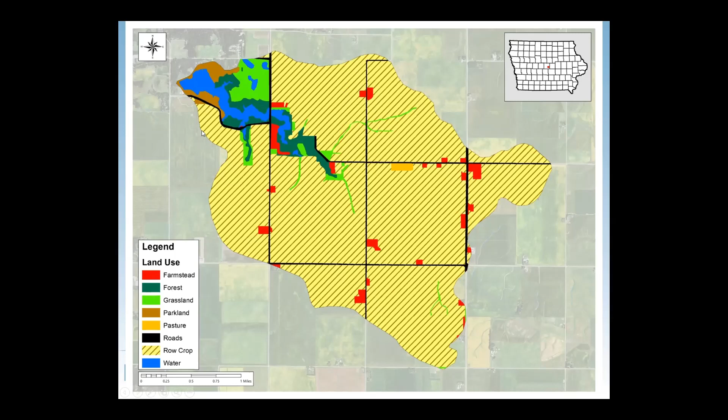We'll sometimes zoom in a little bit on the lake if we want to show features that are happening inside of that park area and inside of the lake. On this one, Jim's going to talk about where we have information, which is indicated here with this little red disc. And so sometimes you'll see us zoom in a little bit on the map, but you'll still have that red outline of the watershed in all of our maps too, so that you get an idea of what we're concerned with. So that's watershed.

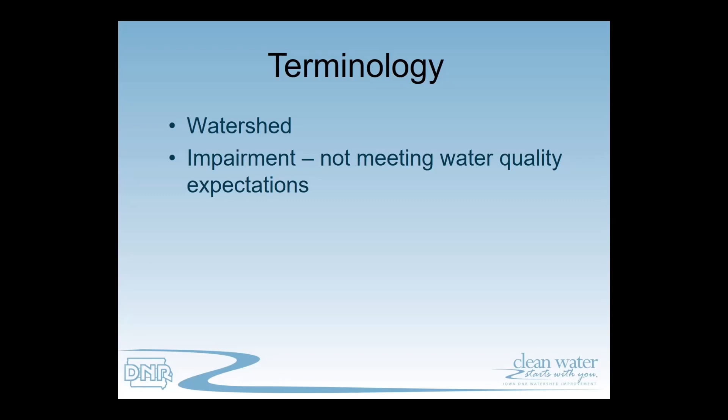And the next term that I want to cover is impairment, something that you'll hear a lot or see a lot. Basically, any time that we're talking about an impairment, what we're referring to is something that's not meeting our water quality expectations. So this can be a lot of things. Jim's going to talk about what specifically the impairment is for Hickory Grove Lake, but anytime we are working in any watershed across the state, that's why we're here. This program is designed to try to figure out what's going on in the water body where it's not meeting expectations. And so that's all that word stands for, is that there's something that's wrong with the lake based on what our expectations are for that lake or stream if we're working in streams.

The next terms, point and non-point source pollution. Basically, we don't have to worry about point source pollution in this particular project. Jim will talk about that a little bit more. The way that I like to think about point source pollution is that it's covered under a permit that the department would issue. We see that a lot with, say, wastewater treatment plants or industrial facilities that get issued a permit that allows them to put water into the waters of the state that may contain a pollutant of concern. We don't have any of that in this particular watershed, so we don't have to worry about it.

Non-point means everything that's not permitted that would contain that type of pollution. And that's what we're most concerned with in this lake, is that we're having too much of that non-point source pollution that's coming in. Jim's going to get into some specific ideas, but I think that the main thing to take away about non-point pollution is that it is not permitted discharges. It just happens through various sources to get itself into the lake.

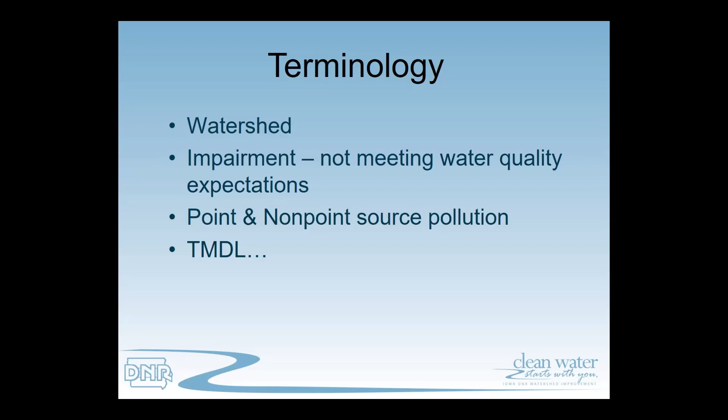And then finally, I wanted to cover the term TMDL. We already had it on the original slide, as my title is the TMDL program lead. Jim's the TMDL project lead. And so what does that stand for? The acronym stands for total maximum daily load. And those words are very important to our work. I found this picture a long time ago when I started working, and I thought it really helped me understand what it was that we were trying to do.

If you see this pack mule here and the cart that's humorously packed way too much and has him up in the air, imagine that there were no boxes on that cart, and that donkey could run around all day with that cart on his back without really any issue. Now, as we start to add boxes to the back of that cart, it gets harder and harder for that animal to pull that cart around, to the point where he's not going to be able to move it at all, and to this point where it's so much weight that it actually flips him up in the air.

And if we think about this with a water body like a lake, and the boxes being pollutant, we can put a box or two or three or maybe even four boxes of pollution onto that lake, and it's going to be fine. It's still going to meet our expectations. There's an amount of natural ability for a water body to assimilate, is what we call it, but basically handle a certain amount of pollution and not violate any of the expectations that we have for that particular water body. But if we put too many boxes of pollution into the lake, we're going to start seeing problems. And so our goal with the total maximum daily load document and the program is to figure out how many boxes we need to take off.

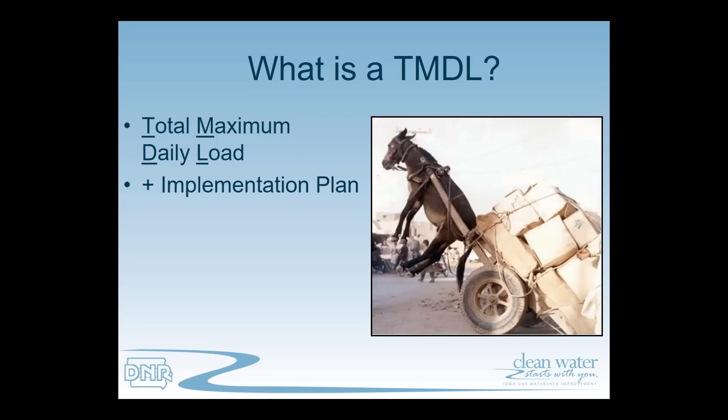Those two things together, Chapters 3 and 4, we consider those the major elements that create what we call a water quality improvement plan. So you may see that term on the front of the document and wonder what that means. What we feel that means is not only the TMDL numbers, but also the information to help start the planning process. So that's what the water quality improvement plan is. Sometimes I refer to the document as a TMDL. You may hear that sometimes as well. They're somewhat interchangeable, but those are what those terms mean.

And then I wanted to just show one of the charts that Jim is going to show. And I think this is an important point. Anytime that you're in a presentation or that you're reading a paper like this and you see charts, we're trying to convey a lot of different information with what we're doing. And the benefit of a recorded presentation like this is that if it doesn't make sense the first time, you can hit pause, you can continue to look at the graph or the map to make sure that you get it before you move on, or just hit back 30 seconds or 2 minutes and restart the presentation from the point that that slide starts.

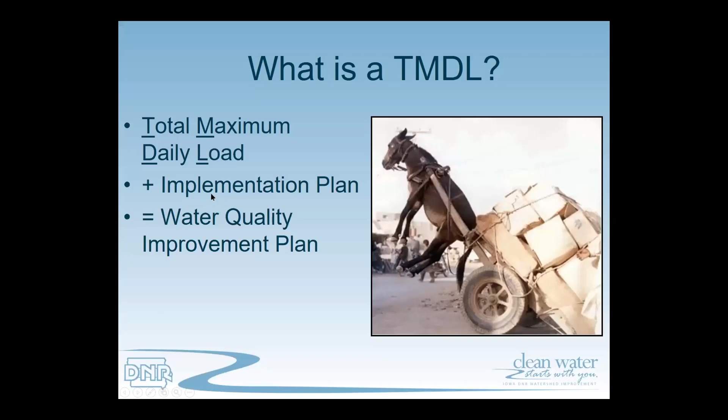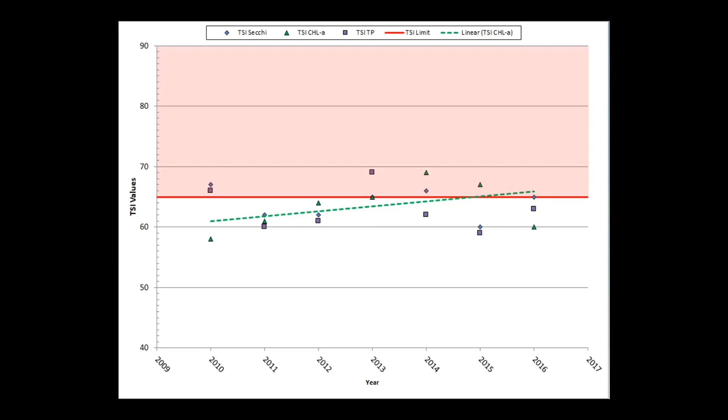So again, Jim's going to walk you through that and explain it, but anytime I see something like this, I'm going to make sure that I understand what the scales are telling me, what the axes are telling me, what the points are telling me. So that's just a little note before we go. And next up, we'll have Jim take us home.

We're going to talk a real brief description about Hickory Grove Lake and the watershed itself. We're going to talk about water quality assessment, how we determine a lake is impaired, how we go about doing that, and then we're going to talk about our TMDL development. As Jeff had mentioned, it's a mathematical equation, how we develop the math to come up with that maximum daily load. And then we're going to talk just real briefly again about implementation planning, some things that we can do moving forward.

Okay, so for a water quality improvement plan, the first step that we take is to monitor and assess a water body. That entails us collecting samples and doing some analysis on those samples that we've collected. Then we do a draft water quality improvement plan, and that's kind of where we are right now.

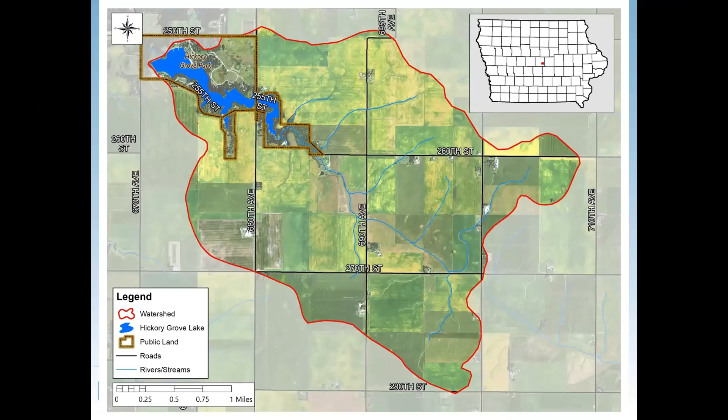Okay, so the watershed itself, Jeff talked about that a little bit. The watershed itself has a drainage area of approximately 4,037 acres. And the lake is located within the Hickory Grove Park, which has an area of about 445 acres. Hickory Grove Park is owned, maintained and operated by Story County.

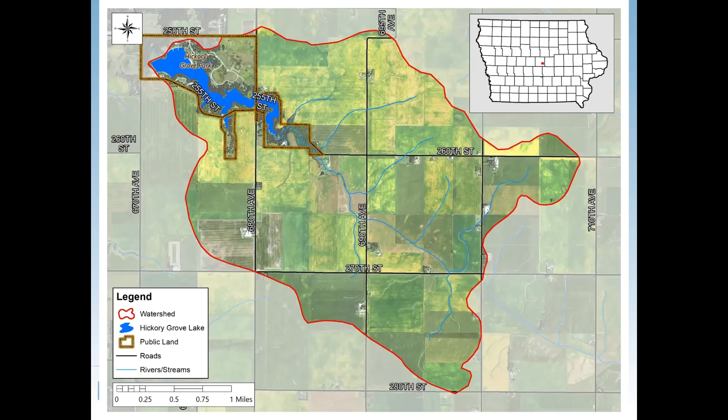We look at the land use within the watershed. It's pretty much strictly row crop, with 85% of the land as row crop. That would be either corn or soybeans, but a very large percentage of the land is row crop. And some of these other ones like grasslands and roads and water and forest, each of those make up 3% of the watershed. Again, row crop makes a very large percentage of the land use within the watershed.

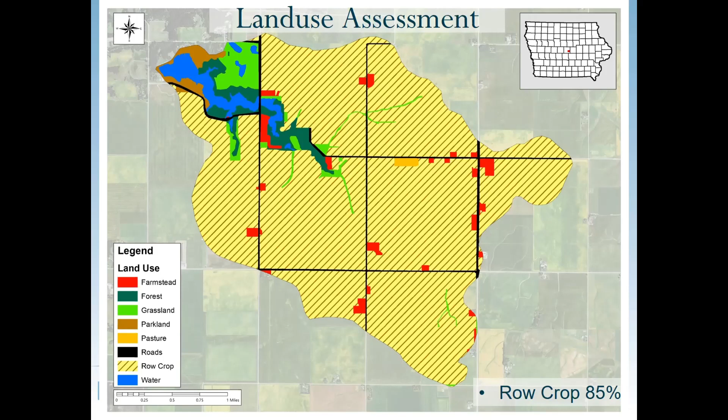Excuse me. Another thing that we look at is the topography of the watershed, and for the watershed of Hickory Grove Lake, it's pretty flat. The average slope is 3%, and 91% of the watershed has a slope that ranges between 0 and 5%. Again, it's relatively flat, with some gently sloping topography, mainly in these areas close to the lake where there are some defined channels.

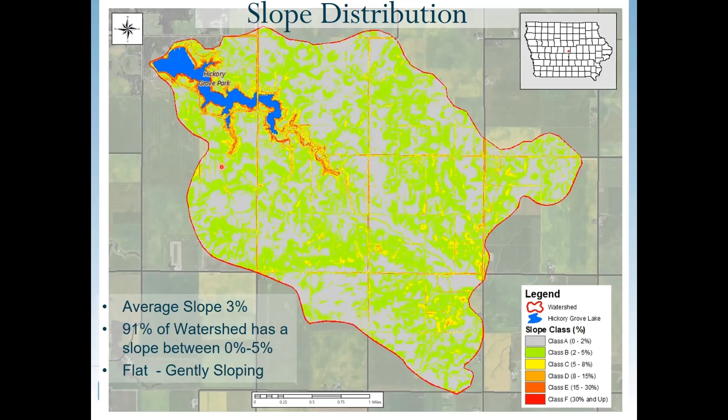All right, so an assessment of Hickory Grove, we kind of asked the question, well, what's wrong with Hickory Grove? And a couple of things. Water clarity is the issue, and that results from sediment, that are suspended solids in the lake. The other issue is algae, which results from excess nutrients in the lake, specifically phosphorus and nitrogen, which can also create clarity issues within the lake itself.

So to determine if an impairment exists or not, we go through collection and analysis of water samples from the lake. So this little dot here shows where we collect our samples from Hickory Grove Lake. They're typically near the spillway, and it's the same location every year. It's generally going to also be at the deepest part of the lake.

Those samples are collected during the recreational season, which is March 15th through November 15th, with most of the samples being collected between Memorial Day, which is late May, through Labor Day, which is early September. And those samples are collected annually.

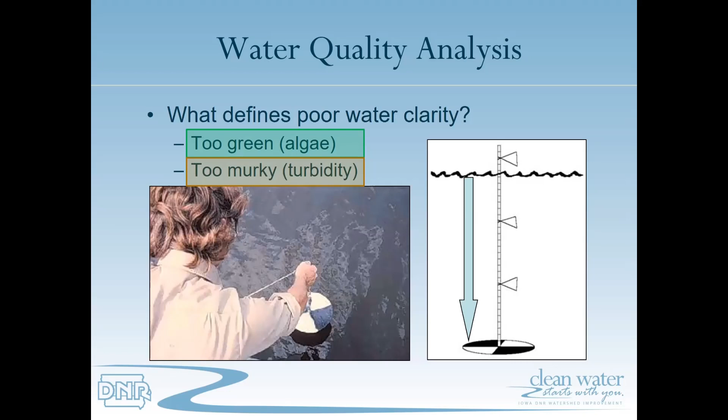Okay, so once we've collected our samples and done the analysis, we want to plot them to see what trends might exist, or how they relate to water quality. And so here in this graph, we've plotted our year across the bottom, across the x-axis, and on our y-axis, we're going to plot what we call the TSI value. The short answer for it is a trophic state index, but it is a classification system designed to measure the biological activity within a water body. And so the higher the number, the more biological activity exists, and the lower the number, the less biological activity exists.

I've put two lines here, a red and a blue. Now the red line represents our impairment limit. We want to keep our TSI values below 65. So as we look at that data, if our TSI values exceed 65, then the water body becomes impaired. Now, this blue line represents a TSI value of 63. Once a water body has been impaired, in order for it to be removed from the impaired waters list, the TSI value must drop below 63 for an extended period of time. It can't just show up 1 year below 63 and be taken off. It has to stay below that 63 value for an extended period of time.

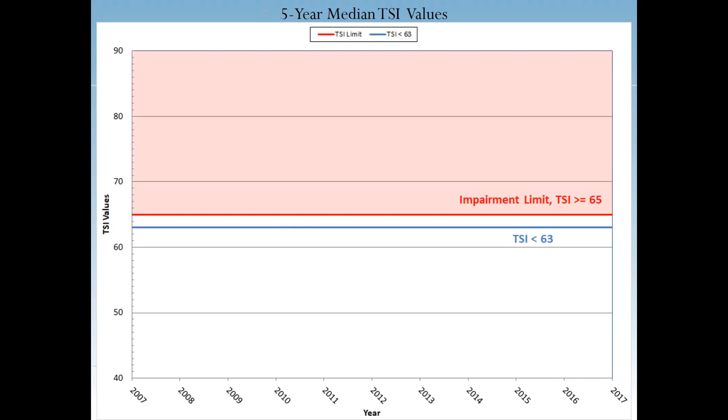The other thing that I'd point out here is that with these first couple of graphs, we're looking at a 5-year median TSI value. And so, for example, for 2016, the 5-year median values would be the data collected from 2012 through 2016. So that would be the 5 years. So with that data, we're going to go ahead and plot it. The purple squares represent our TSI values for TP, or total phosphorus. The blue diamonds are our TSI values for Secchi depth, and our green triangles are TSI values for chlorophyll, which is a representation of how much algae is in the lake.

And again, this is a 5-year median value. So if we go back to 2008, we can see with our chlorophyll values that the values are trending upward till we hit the year 2014, where we reached a TSI value of 65, and that's when Hickory Grove Lake was placed on the impaired waters list. And since 2014, we see that it's kind of leveled out a little bit. It hasn't begun to drop yet down towards that TSI value of 63. And the green line is just a trend line, and it shows from 2008 that the trend for our TSI chlorophyll values is increasing.

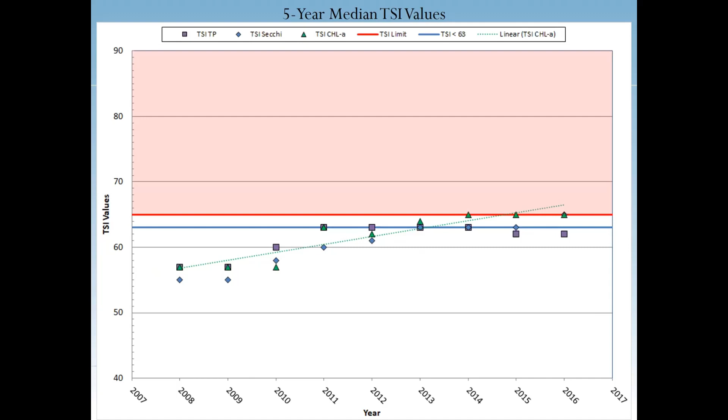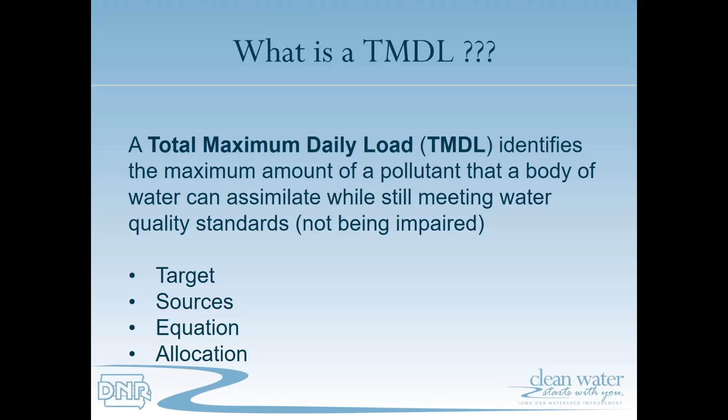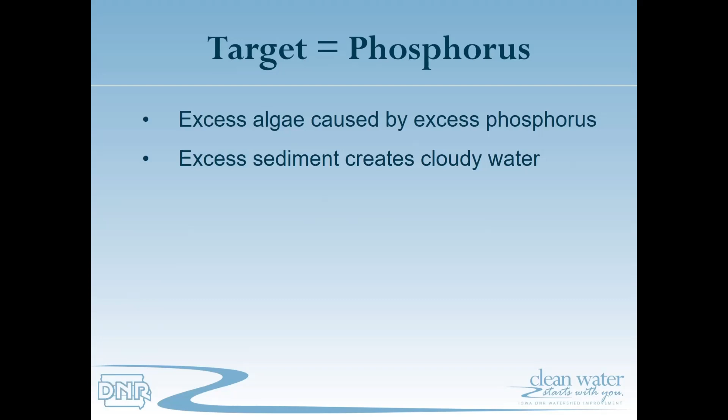All right, so in this case our target is phosphorus. Phosphorus leads to algae. It's also tied to sediment, which creates clarity issues - we talked about that within the lake itself. And phosphorus is transported either through sediment or runoff and through groundwater flow. So our objective is to reduce the sediment-laden runoff that goes into the lake, stop it from getting to the lake as much as possible.

So the sources - Jeff talked about this, and I'm going to talk about it a little bit more here. There's two sources: a point source and a non-point source. Our point sources would be like a wastewater treatment plant - that's probably what I see most of the time throughout the state, and it's something that needs an NPDES permit.

So all point sources require a permit. We have no point sources within this particular watershed, so in our analysis we don't have to consider this source in our evaluation because they don't exist within the watershed. The other source is the non-point sources, and that would be anything that does not require a permit.

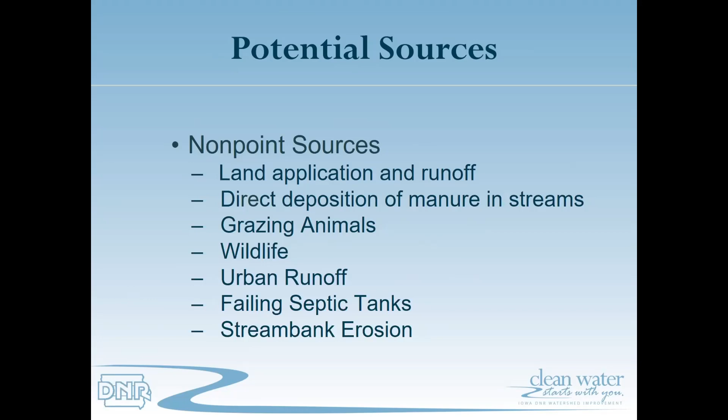That would include land runoff, direct deposition of manure in streams from grazing animals, failing septic tanks, stream bank erosion, and so on - just a list of a handful of non-point sources. Again, non-point sources do not require a permit, while point sources do require a permit.

So a brief summary here: our target pollutant is phosphorus, and our sources are going to be non-point sources. The next thing we look at is the equation, the TMDL equation, or the math associated with it.

It's a pretty simple equation: our total maximum daily load is equal to the summation of our waste load allocations plus the summation of our load allocations, plus a margin of safety. That probably requires a little more explanation, because point sources receive waste load allocations - they have a permit that limits the amount of a pollutant they can discharge, so that's a waste load allocation.

If we had point sources within the watershed, we would sum up all the phosphorus that those point sources would discharge and put that into the equation. But since we don't need to consider this, this is zero. So then we're left with a non-point source allocation and a margin of safety, and the non-point sources would be just a load allocation.

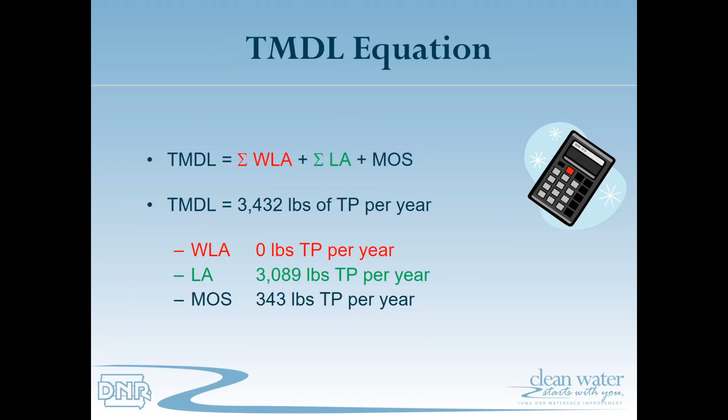We look at that in a different way. The one thing right now, as we've gone through our analysis, is what is coming into Hickory Grove on an annual basis: 5,529 pounds per year. Our goal and objective is to get down to 3,432 pounds per year, which translates into a 38% reduction of total phosphorus to the lake.

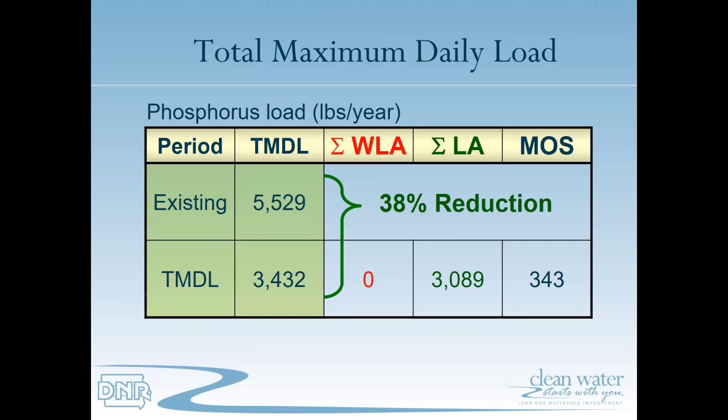All right, so we've looked at those first three bullet points. The next thing we look at is allocations.

How that phosphorus is divided up amongst the non-point sources. As we said, the land use is 85% row crop. So if we look at where the phosphorus is coming from, it makes sense that most of it's going to come from our row crops, with roughly 87% of the phosphorus load coming into Hickory Grove Lake from row crop, and approximately 13% from all other sources. It just makes sense that with a high percentage of land use being row crops, a higher percentage of the phosphorus would come from the row crops as well.

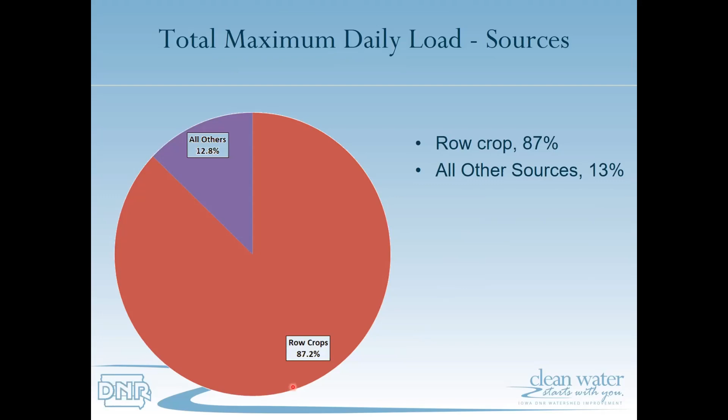So with an implementation plan, we've determined the existing load, and then we want to look at what we can do to improve water quality. The implementation plan looks at possible solutions, best management practices. It encourages local participation, and again allows and encourages future monitoring.

Some of the best management practices that can be implemented fall into three categories. One of them is land management, which is prevention - how do we keep the phosphorus or the pollutant at its source, not letting it get beyond its source. This kind of practice provides benefit to both soil and water quality.

Here are a few examples of land management practices: no-till, conservation till, cover crops, perennial strips, manure and nutrient management.

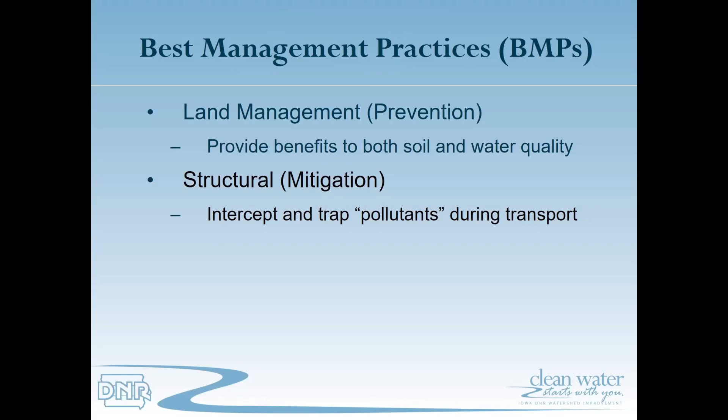Another practice is structural or mitigation - we intercept the pollutant during transport. If it gets off the land, we want to intercept it and trap it before it gets to the lake. Examples of these include riparian buffer strips, saturated buffer strips, and sediment basins.

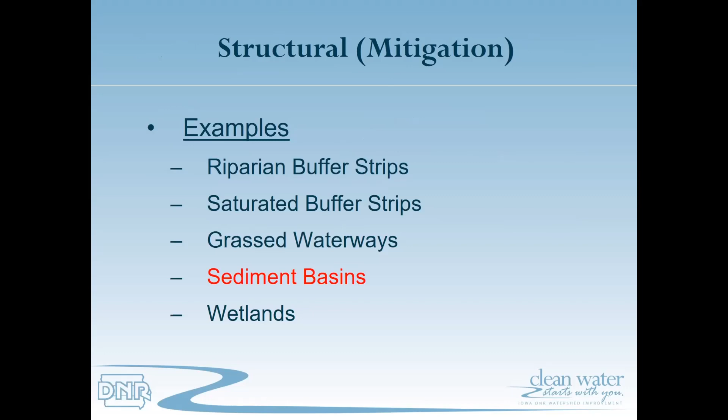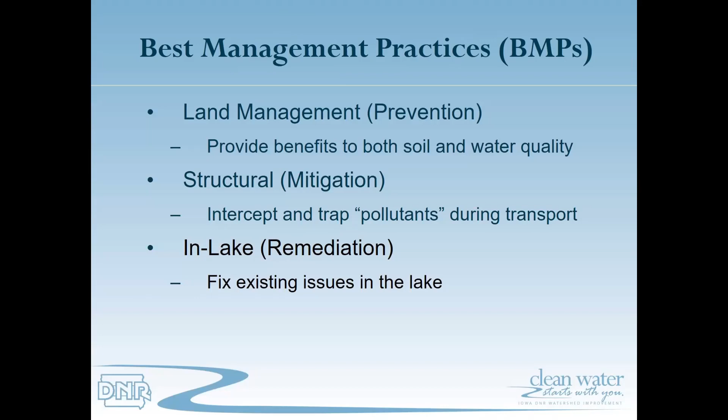And the last practice is in-lake remediation - fixing the issues in the lake at the lake itself. Some examples of these would be fisheries management, shoreline stabilization, and targeted dredging.

I have to add here that Story County has been pretty proactive. Last year they lowered the lake and began a lake restoration project where they've implemented all three of these practices. As they've lowered the lake, they've removed carp, which consumes plant life and also takes up phosphorus. The fish stir up the bottom, which resuspends sediment and phosphorus off the bottom.

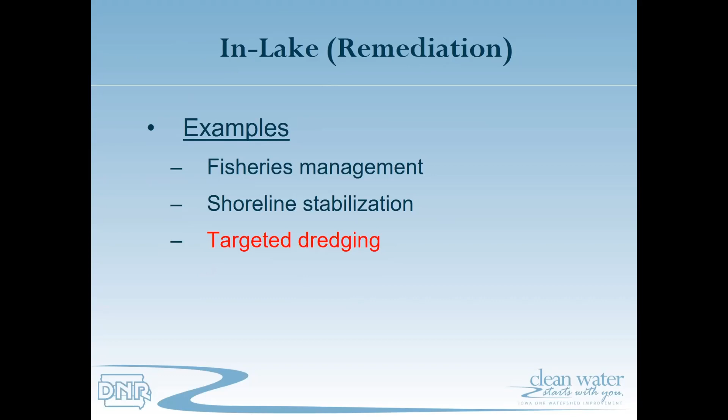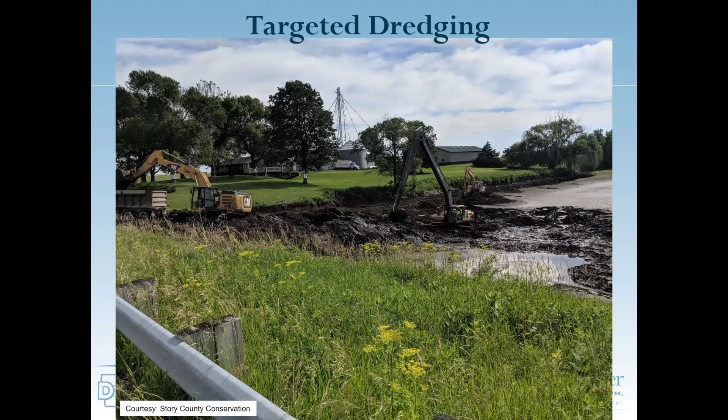So our next steps are to continue to monitor, continue to assess the practices and BMPs that have already been implemented, and to encourage local efforts, allowing DNR to be a resource for them and provide technical assistance as they go through this process.